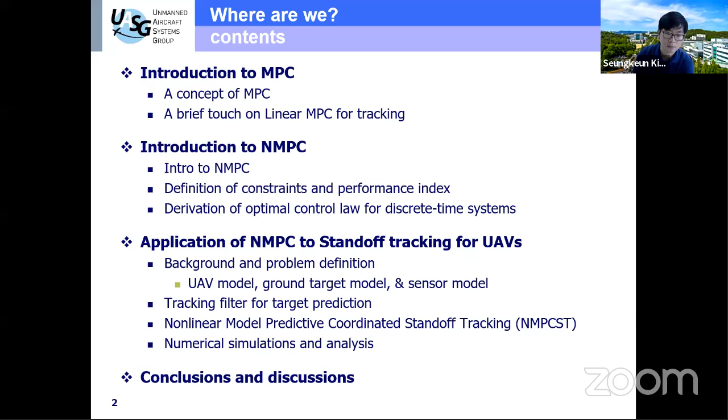Okay, briefly, MPC repeats: plan for the future and do now, repeatedly, plan for the future and do now. As shown, can you see the laser point?

Yes, so we're doing the planning and do-now, act and plan, and do-now at every sampling time. Actually, this is open loop optimization because in the future time, there are no sensor signals. So at each sampling time, MPC solves an open loop optimization problem. For this, we need the model for prediction.

For a linear system, a state space system, we can easily predict the motion of the state variable by using the Euler integration formula. In case of a nonlinear system, in a similar way, we can predict the future state using the nonlinear equation: x dot equals an arbitrary function of the nonlinear system, a function of state and control input. So we can call it nonlinear MPC.

Today I will talk mainly about nonlinear MPC. For this, the important thing is the length of predictions. Actually, however, it is difficult to do for an infinite horizon.

So we will set up the prediction horizon. Actually, if we set the prediction horizon longer and longer, it causes computation burden, and then we cannot control the far-away performance index. So the far-away performance index can be met, but the closest time cannot be guaranteed.

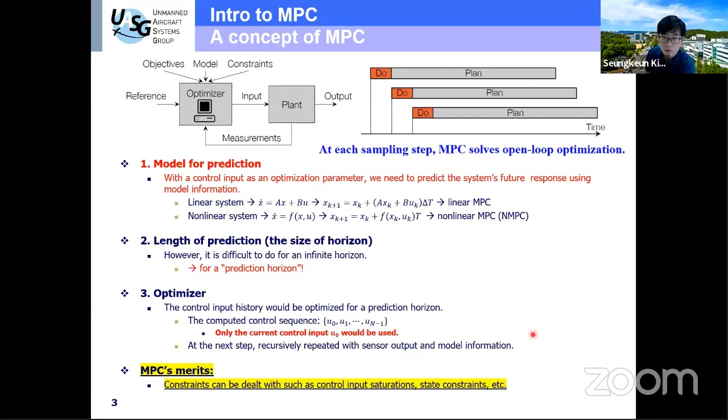Especially the linear MPC is widely used for chemical plant process and process engineering. Normally the cost is set up as the final time command tracking error, and then delta U, the control input increment, and then the other time steps' command tracking error. So Y equals CX. If we have the desired Y, we can set a Y tilde, and then inequality constraints can be considered.

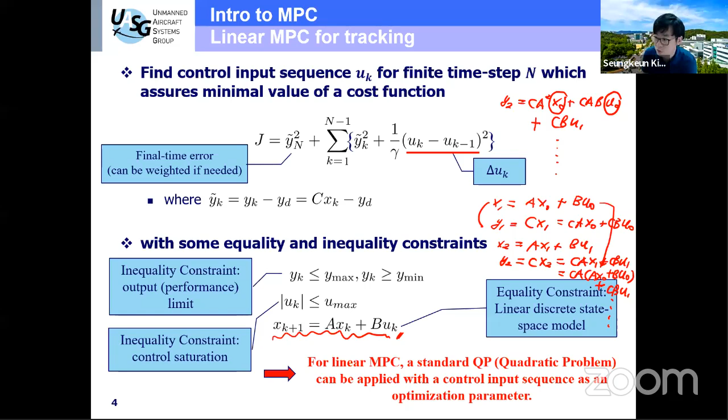In this way, we can use this for collision avoidance of autonomous cars and drones, etc. I have experience with that, but today I will focus on nonlinear MPC, the nonlinear model predictive control. So I will just briefly touch on this linear MPC.

Now let's move on to the introduction to nonlinear model predictive control. This figure shows the overall block diagram of the nonlinear model predictive control. So there is a plant here, generally represented as this nonlinear equation in a discrete time domain, and this is the initial condition. Then the output is fed to the state estimator, and we can get x hat here.

So this NMPC controller requires, firstly, the cost and constraints, and secondly, the predictive model. This is very important - we have to use this equation, and it has to be accurate. Normally I'm using just the mass point model. This is kinematics, not dynamics, and kinematics is very accurate. We can use it for path planning or the guidance level. So the optimizer can use these two elements to generate the control signal U here.

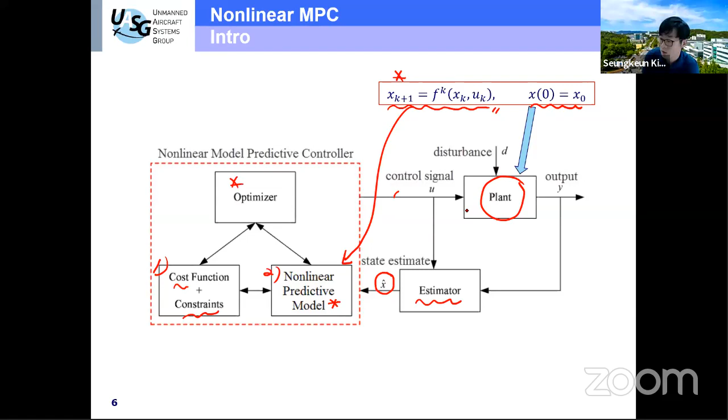So the constraint is the nonlinear discrete time dynamic system. I will call this equation 1: Xk plus 1 is an arbitrary function f of the time k, state, and control, with this initial condition. Another one is the performance index, the cost, what we want for guidance or path planning. I will talk later about standoff tracking, and how I set this performance index for standoff tracking.

Normally it has two components. The first one is the final time cost - what we want and have to minimize at the final time, this is phi, and then this is L. Then there's the other time steps' cost, from the initial time step to N minus 1. Actually, at the last time step, large N, we cannot decide the control input at that time. So normally we separate the final time cost from the in-between time cost.

So our optimal control problem is to find control UK star on the interval from the initial step to the final step that can drive system 1 along the trajectory xk such that the value of the cost, or performance index number 2, is minimized or optimized.

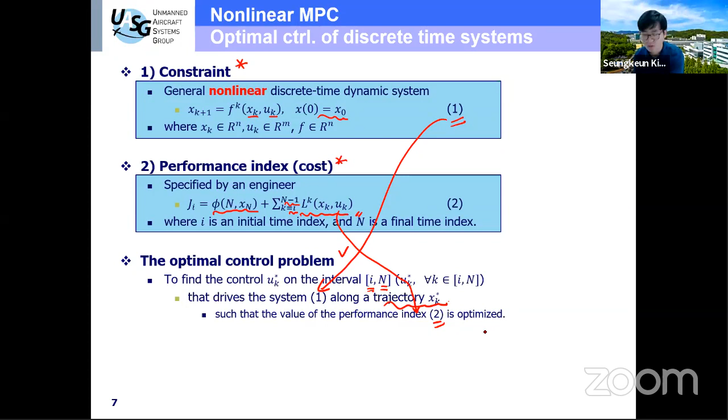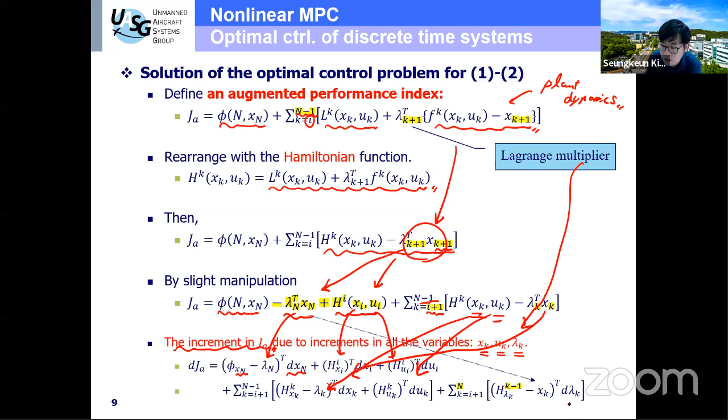And then lastly, the function of lambda here and here, so you can get these two terms.

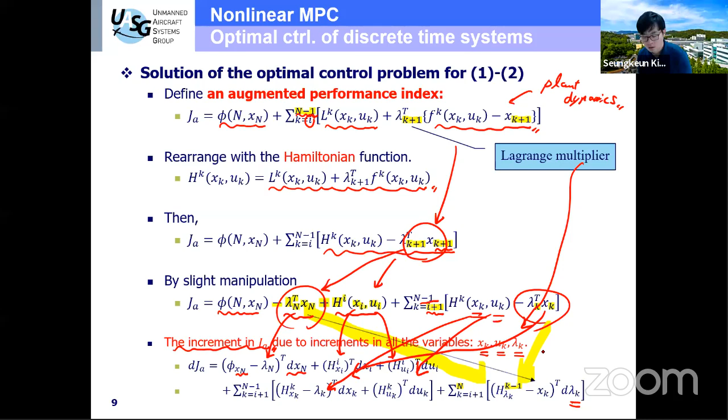It is a complicated set of lines here, sorry about that. So finally, we are getting this final differential form of the cost.

For this cost to be optimum, it has a minimum point, so the differential should equal zero. So here, here, and here must be zero, and we can get these three equations.

This equation is actually the dynamic constraint, the dynamic equation for the plant from equation 1. This equation is the co-state equation about the Lagrange multiplier. And this equation is the optimality condition with respect to u.

And then here, there is a boundary condition for the final time and initial time. So for the final time, this term should be zero to be minimum.

However, normally our final state is free for optimization in our application, so dxn is not zero. So this term must be zero, and we can get one boundary condition here.

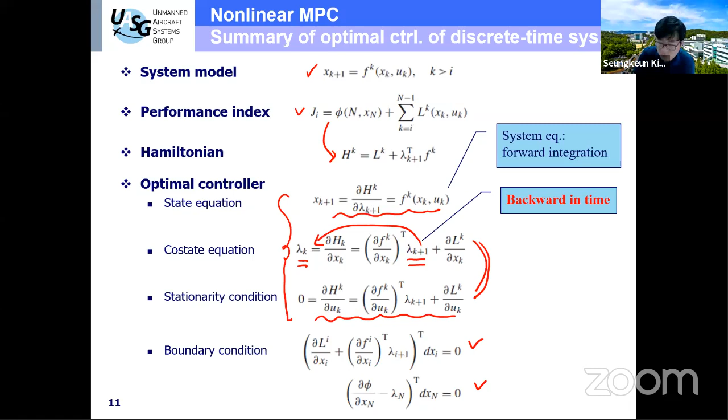Before going to the standoff tracking application, I will introduce this book and this website. Actually, this is not my book, but it is very good for a first-time user of nonlinear model predictive control.

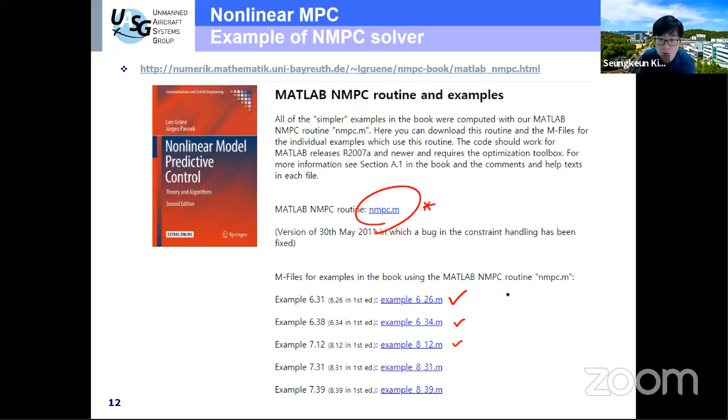If you go to this website, you can get the nonlinear model predictive control routine, the function, and there are examples here. That is very good. And if you see the nmpc.m file, if you download it, you can see that fmincon is used.

fmincon is a function for minimization with constraints. This is a MATLAB function built inside MATLAB. So you can easily set up the cost and constraints. This one is very useful for a first-time developer of nonlinear model predictive control.

So I'm just introducing this website. Actually, I didn't use this function for my application, but a first-time user can use this kind of toolbox.

Now let's move on to the application of standoff tracking for UAVs. First, I will talk about the background and problem definition.

I assume the 2 UAVs can track this ground vehicle, a car. There are 2 things we want. First, standoff distance keeping - I want to keep the distance from the target to the UAV, RD. In my simulation that is 500 meters. The other is antipodal tracking.

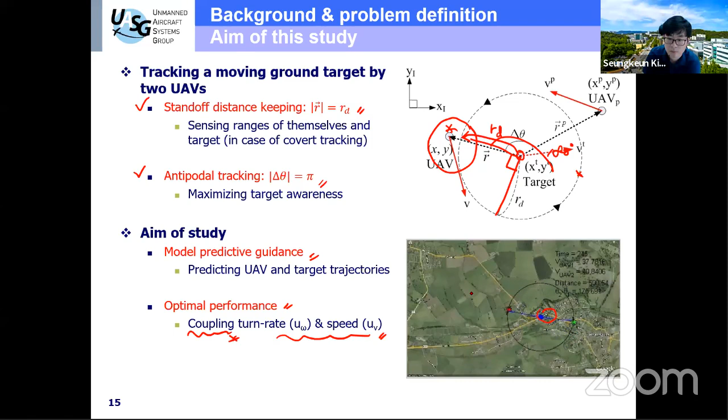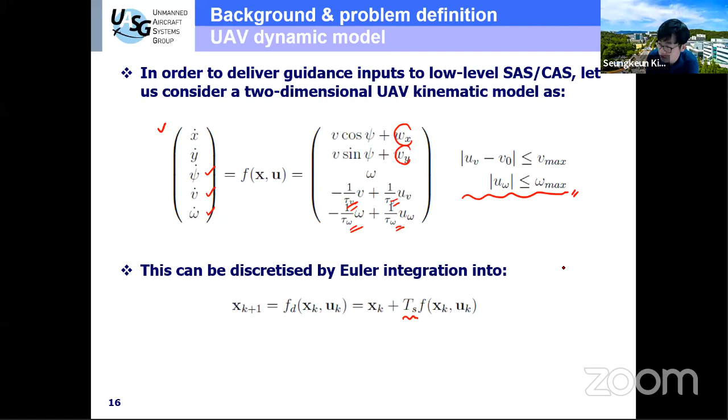The UAV dynamic model is simply a point mass model: x dot equals v cosine psi, with disturbance, where psi is the heading angle, and velocity and rate of change of heading. There is some delay in the control loop, so I assume a small delay inside it. This equation can be described by Euler integration using sampling time, and there is a control input saturation setup here as an inequality constraint.

For a realistic situation, I designed the tracking filter using a Kalman filter. Although ground vehicles generally move at lower speed than aerial targets, they irregularly stop and go with small radii. I'm using a traffic simulation program.

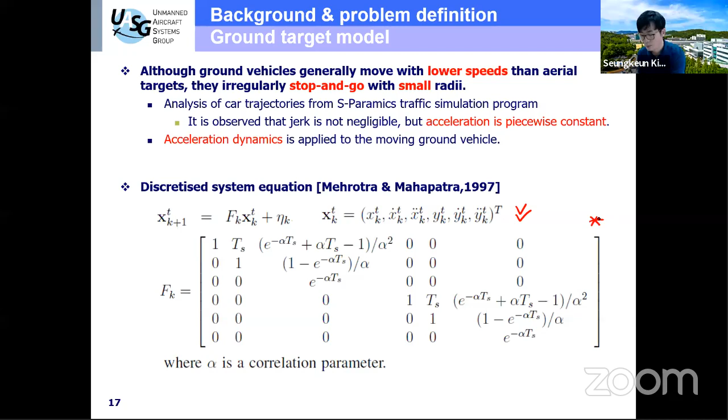It is observed that jerk, the differentiation of acceleration, is not negligible, but acceleration is piecewise constant, so acceleration dynamics can be applied to the moving ground vehicle. This is the acceleration dynamics model proposed by these authors in 1997, which I'm using as the target tracking model.

The process noise of the target acceleration characteristics can be set up as shown here. You can see their paper about the tracking filter, the linear model, so I'm skipping the detailed explanation.

Let's move on to the sensor model. I assume the UAV is carrying a moving target indicator radar to localize the position of the target, but it is not sensing the position directly.

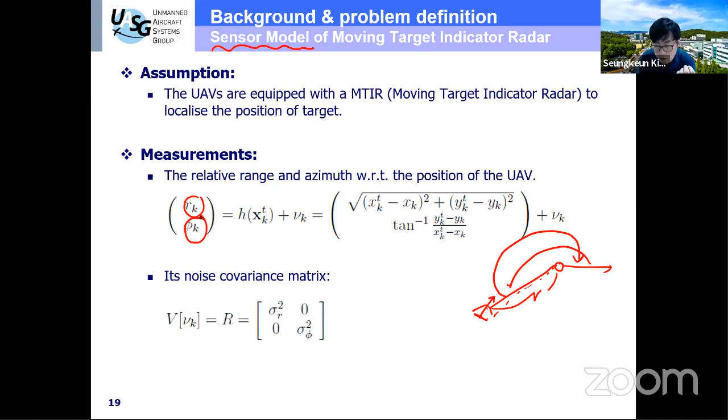Here is the UAV and the target here - they are sensing the heading angle, azimuth, and distance r. So our measurement is the relative distance and relative heading to the target from the UAV. This is nonlinear, so we have to apply the extended Kalman filter here, and we can set up the noise covariance matrix this way.

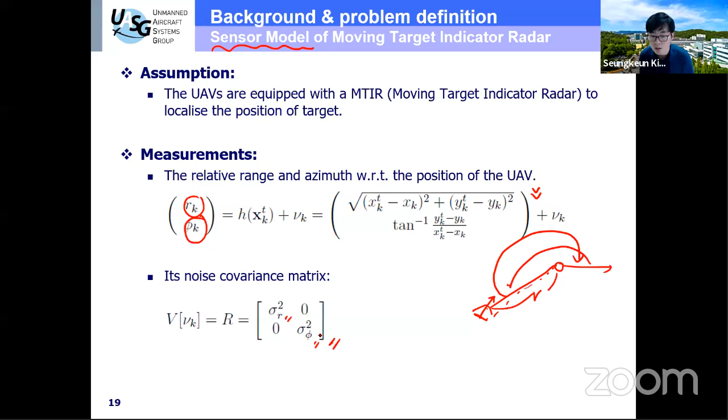Are you with me? Okay. Yes, yes, yes. Now let's move on to the tracking filter.

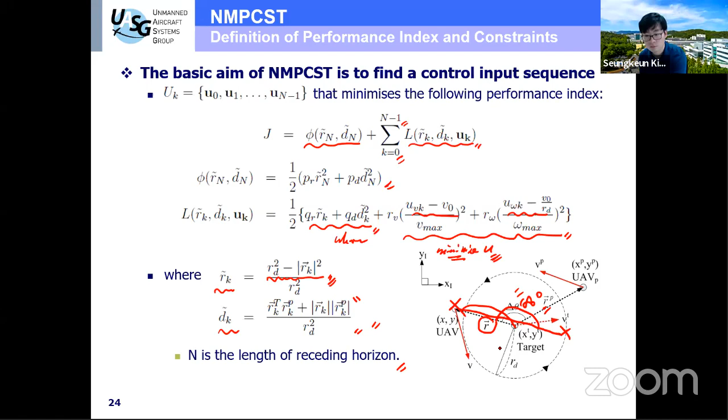This is why I'm using this kind of cost for antipodal tracking here. D tilde is derived from the inner product of RK and RK pair. So it's target and UAV1 here, and UAV2 is here. This is RK, and this one is RKP.

So if you want 180 degrees between these two vectors, this angle becomes pi—very simple. Pi means this is -1. So if you move this term to the left-hand side, you get this equation. If you minimize this left-hand side squared, you get antipodal tracking. This is very efficient compared to using the angle difference directly.

Then there is a normalization problem, because standoff distance keeping is in distance units, and antipodal tracking is in degrees or radians—so there's a gap in physical dimension. So I'm using this kind of technique.

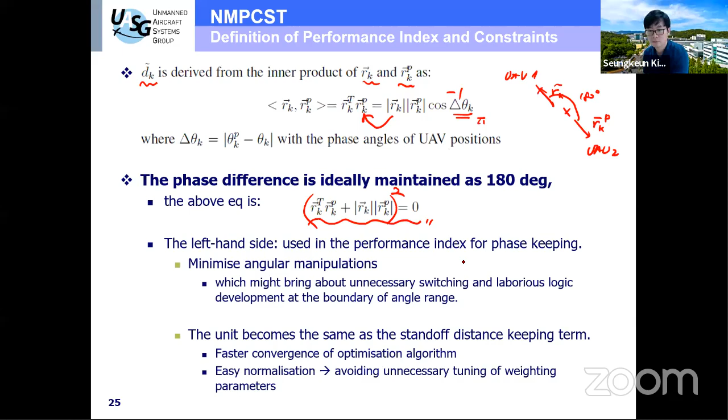So let us set up the augmented performance index defined by incorporating equality and inequality constraints. Here, this is the system equation. And then this one is the cost: standoff distance and antipodal tracking. And then this one is control input saturation, and this is collision avoidance, inequality constraints.

I'm using l here and there, in this way. This makes the inequality constraints applied only when they are violated.

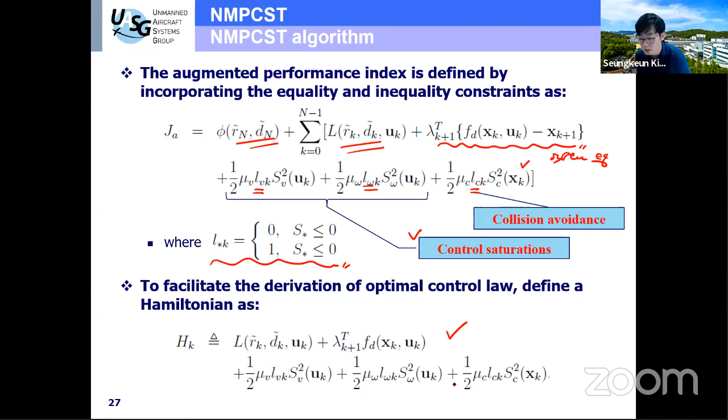To facilitate the derivation of the optimal control law, let us define a Hamiltonian in a similar way, like this. And then, in a very similar way, you can get the variation, like this, as I explained before for the general case.

And then you can get these two conditions. This is actually slide number 10. This is the final time boundary condition.

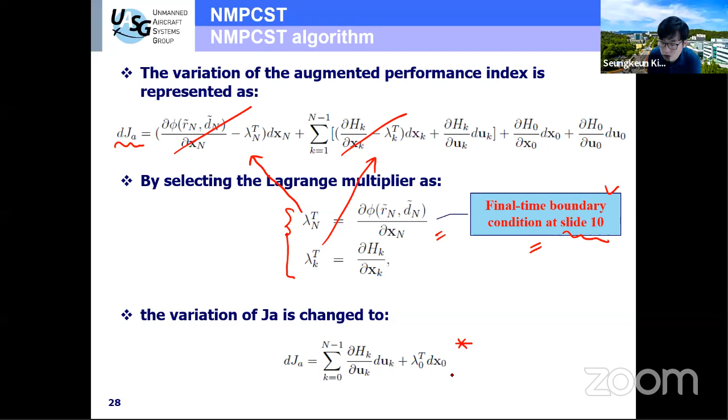So you can get this equation and then variation of JA. If you use this and that, you can get zero for these two terms. So we can get this final variation of cost.

And then here, we need some kind of partial differential equation for partial phi, partial xN, and partial hk and partial xk. So I derived this partial differentiation. That is very easy. It looks complicated, but if you do it, you can get the derivation in the same way.

And then finally, we can select duk like this way. And then if you substitute into the dJA from the previous slide, you can get this type of equation. So this always decreases this sign. So if you apply this kind of duk, the cost can always be decreasing.

So the control input can be updated in this way because duk is here. So next time, uk is decided by using this kind of relation. So if you want to do this, you have to derive some kind of partial differentiation about uk and about system dynamics. So this is straightforward.

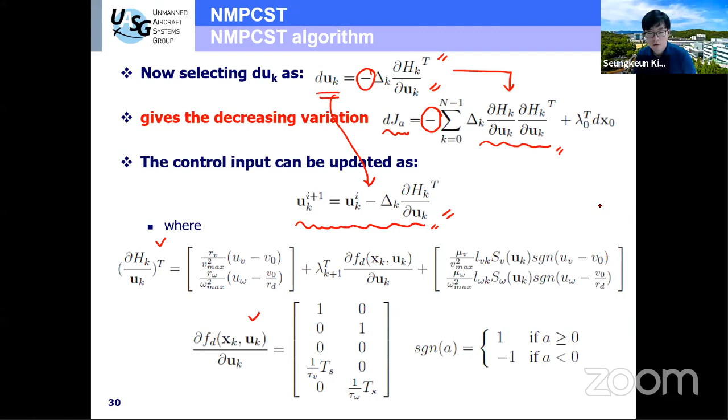Okay, sorry about all the formulations here. So this is my algorithm summary.

So here, this is UAV 1 and UAV 2. By using communications, they are doing separate measurement acquisition from MTIR, and then target localization and sensor fusion, and then communications, and then target state propagation and pair UAV state propagation.

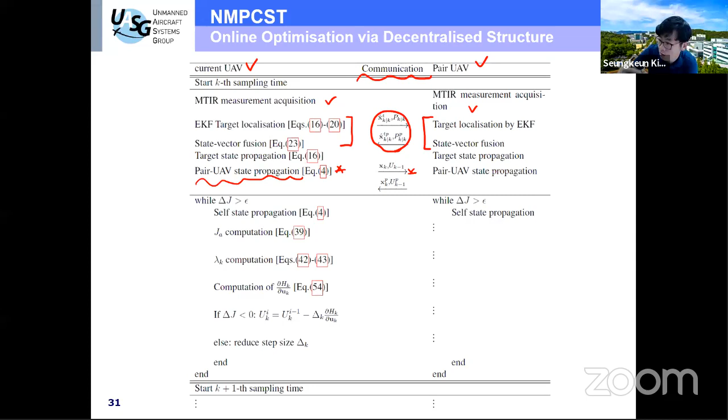We need other UAV's future position and target car's future position. We need that. And then optimization, what I showed up to the previous slide, can be applied in this way.

Lambda and augmented cost and self-state propagation. Self-state propagation means its own propagation using the dynamic model. So in this way, the decentralized structure of online optimization can be applied between the two UAVs.

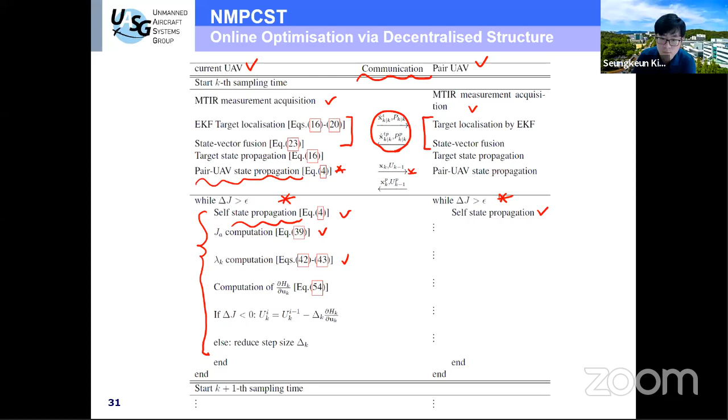Finally, now I'm moving on to the numerical simulation and analysis.

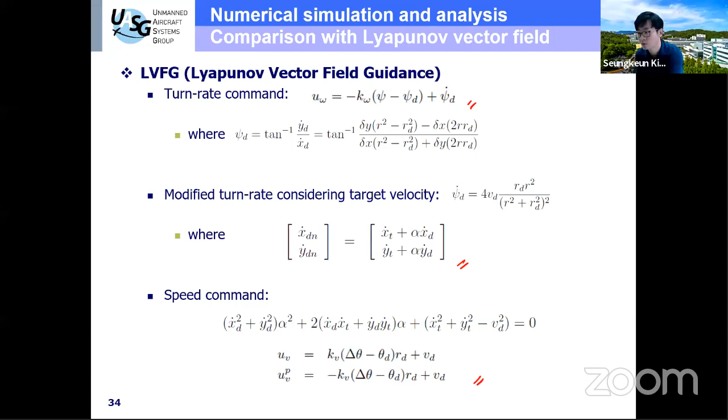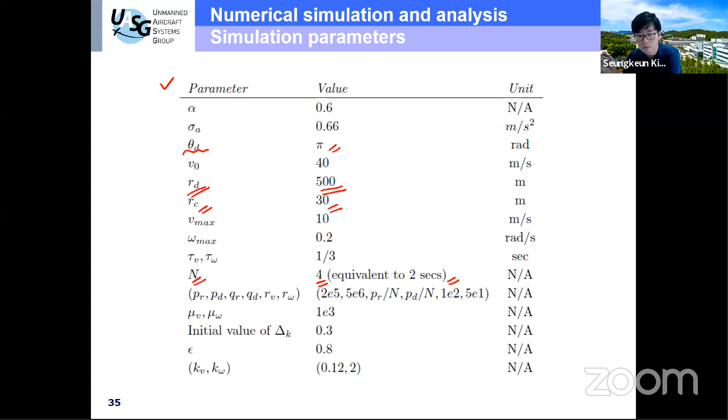Do you agree? It looks very similar, but let us see some graphs.

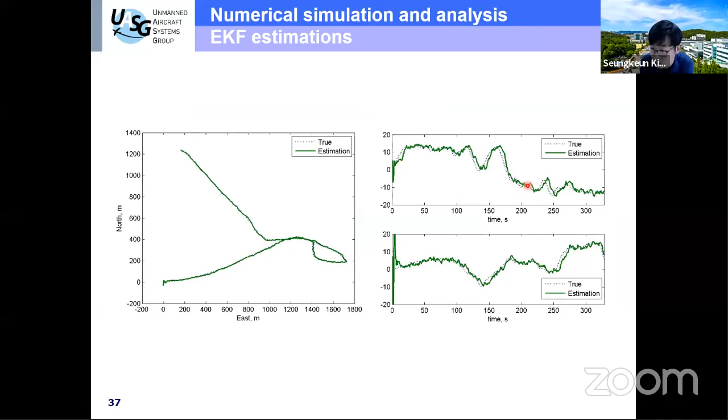Now this is the Kalman filter estimation. So this jittered signal is the sensor signal combined with sensor noise, and then the dotted line is true, and the green line is the estimation by extended Kalman filter after sensor fusion, after communications.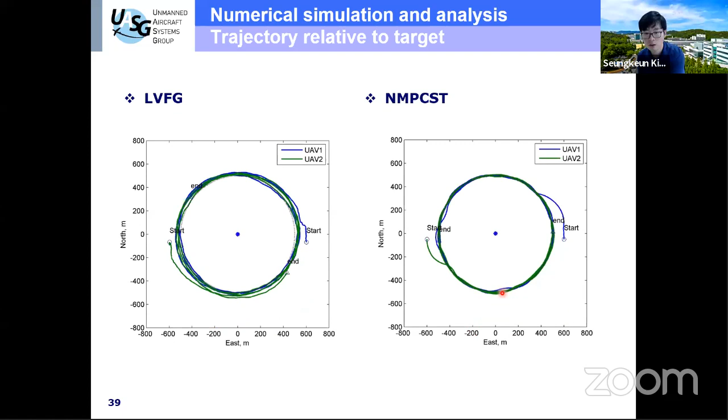This is the relative movement of the 2 UAVs. Can you see the difference? So the standoff distance is not well maintained here, and here. The deviation is much bigger than with the optimization scheme.

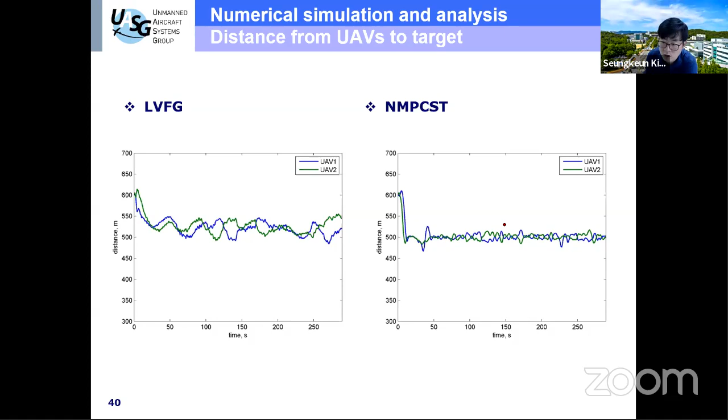If you apply this kind of predictive control, the deviation to the standoff distance keeping is very low. This is the relative distance to target for UAV 1 and 2, and this deviation is smaller than the previous case.

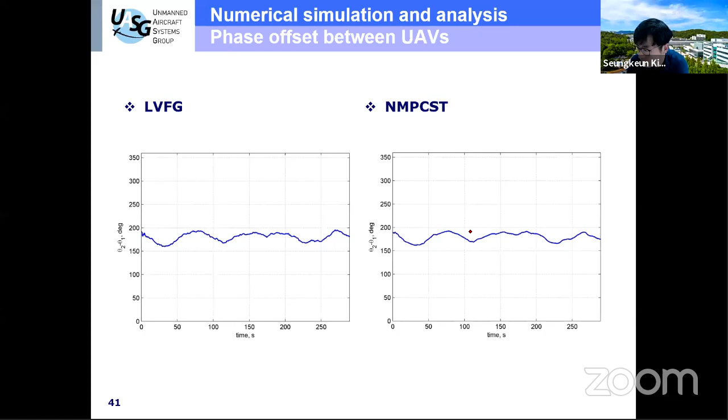And control consumption is at a similar level. So that means the model predictive guidance is using the same level of control, but you can get some optimized performance in the standoff distance keeping.

That was 6 years ago, so nowadays computers are much better. I think it takes shorter than then, and an embedded system could do it now, I think.

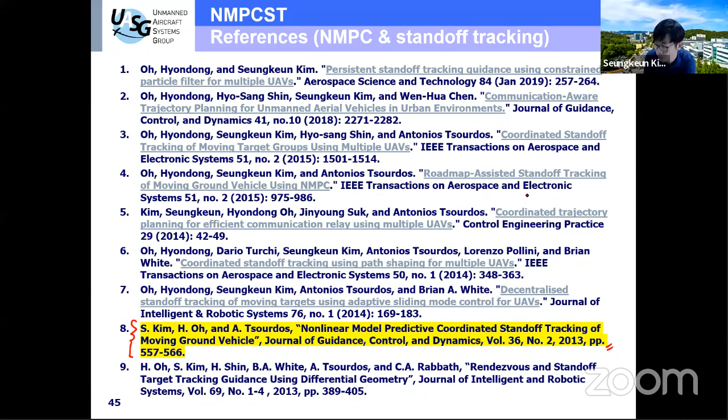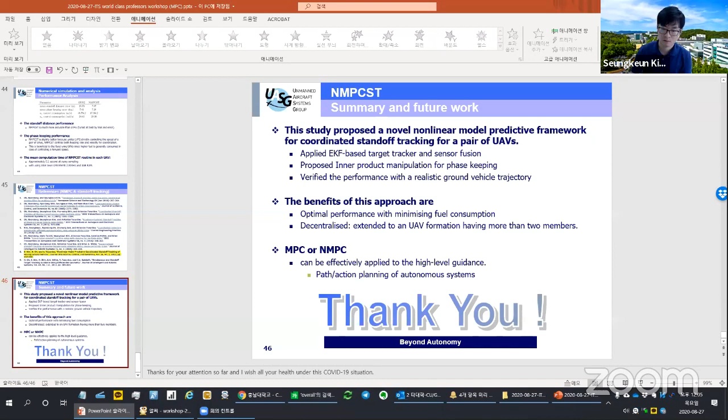Hello, Prof. Kim. Maybe Prof. Kim got disconnected. Just wait for a while. Hello? Hello, Prof. Hello, hello. I think there was some connection problem. So I was kicked out from the Zoom. I'm sorry, was it our network fault? Yes, it looks like it was from the Korean side, I think. Okay, I'm so sorry about the problem.

Anyway, my conclusion is that model predictive control can be applied to UAV guidance with more than 2 members, not for inner loop control or attitude control, but at the level of guidance, position keeping, or commanding to the next waypoint, etc. That can be easily applied to high level guidance, and to path and action planning of autonomous systems.

So only if you can set up the proper cost for what you want, you can easily apply it to MPC. Nowadays MPC is widely used, especially linear MPC in industry. Industrial people think MPC is the most useful control technique for their future, but in autonomous systems and aerospace domains, up to now it is still difficult to apply this MPC scheme to the inner loop controller.

I think so because there are much uncertainties in the dynamics, and aerospace systems are always flying, so if it is falling off, it can be a big problem.

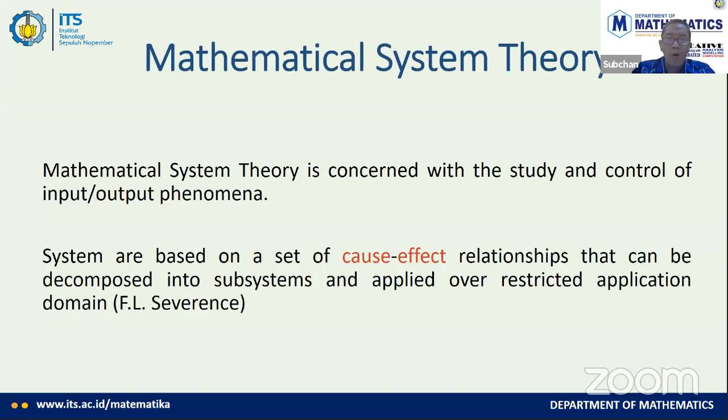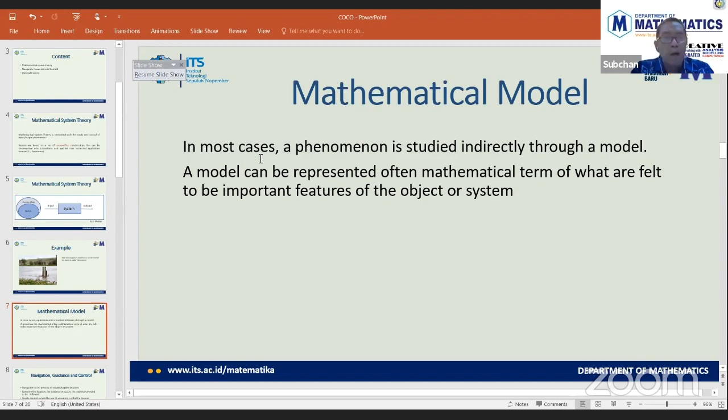Now we are coming to navigation, guidance, and control, which is part of mathematical system theory, as Prof. Kim explained a lot already. What is navigation, guidance, and control? Usually these three words get mixed up together.

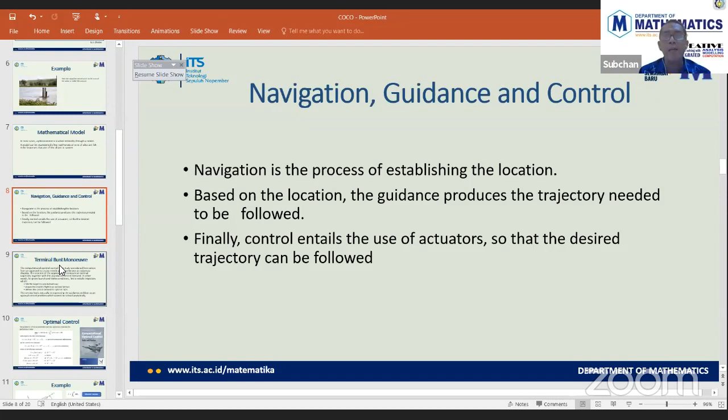It is simpler than Prof. Kim's because this one is open loop, as I use in my book. So we have terminal bunt maneuver. What is terminal bunt maneuver actually?

When we want to hit a target by cruise missile, what we want to do actually is destroy it from above. The missile should find the target from above. Strike is destroying, coming from above the target, or 90 degrees from the target. That's why we call it terminal bunt maneuver.

So in this case, let's say I want to hit the bunker, where the bunker itself is usually not clear, is under the surface of the earth, hidden on the ground actually. That's why we have to hit the target from above.

So in this case, the action of the approach is to compute an optimal trajectory together with the associated control. In other words, for a given launch and strike condition, find a missile trajectory which hits the target in the predefined way, shapes the missile flight in the optimal fashion, and defines the control demand for the optimal path.

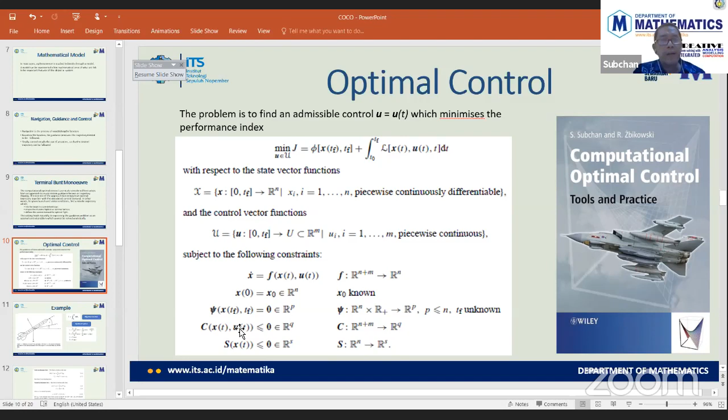Okay, this one is a little bit of theory, and this one is the problem. And this is not a simple problem because the component inside the dynamic here has very complicated terms.

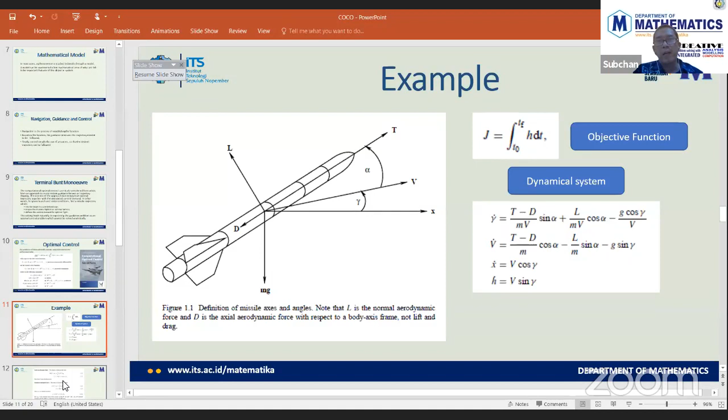Let's say the drag here, D is the drag, and drag force as well we have, and also normal aerodynamic force L here as well. It depends on the coefficient of lift and the wingspan or S reference as well, and here the air density of the area. And we define as well the initial condition and final condition.

And how to solve this problem? Sorry, before that, let me explain a little bit about the constraint as well. As I mentioned before, we have a state path constraint, which is the speed of the missile. It is not as easy as we think - they have minimum speed or maximum speed.

What does it mean actually if we have a missile? Let's have a look. Let's say when we drive a motorbike, when our speed is, let's say, 200 kilometers - not like the MotoGP, yeah. Let's say when we live in Seoul, or Chungnam, or let's say in Surabaya, we cannot drive 200 kilometers per hour. Otherwise our motorbike will break.

And we drive very slow, let's say less than 10 kilometers per hour, then we will have a problem - we will fall down actually because it's too slow, unless you walk with your motorbike. That's less than 10 kilometers per hour. That's why this one is realistic.

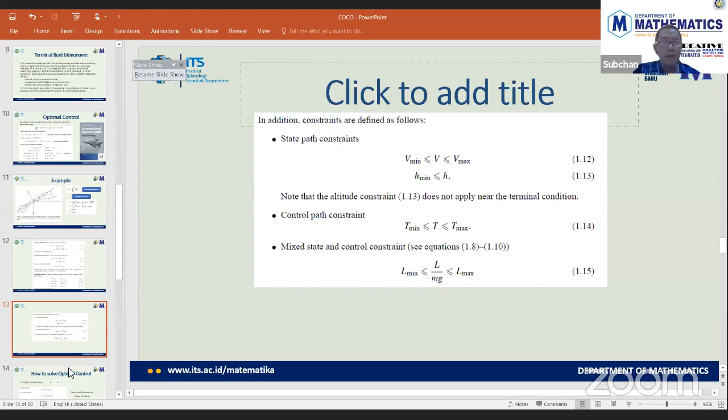Actually, we have to define the Hamiltonian, as Prof. Kim mentioned before. We have H here - I'll make it simpler. We have the Hamiltonian, we have the Lagrangian part of the objective joined with our dynamic system. Then, of course, we have some two-point boundary value problem.

Here is the stationary condition. We have to take a first derivative of the Hamiltonian with respect to all the controllers and set it equal to zero. Then we substitute U itself into the Hamiltonian, and we have to take x dot and lambda dot as the state and co-state equations. As Prof. Kim mentioned, here is the boundary condition. It's simpler than Prof. Kim's actually, because he translated it to the discrete one.

So you know the problem. We want to minimize the altitude of the missile while we want to hit the target from above. So I will give you some results now.

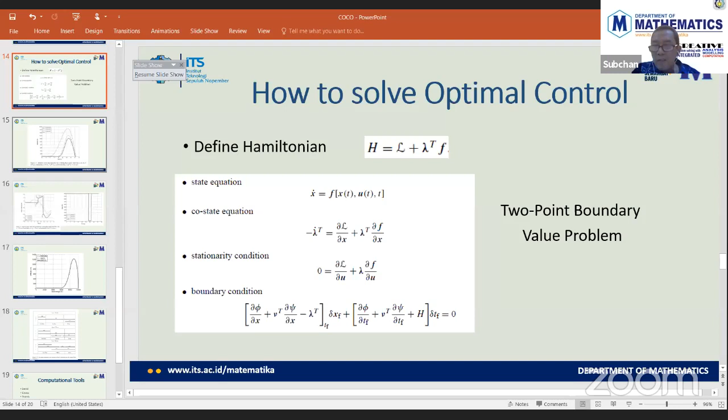Here is the result. I'm sorry, I put the time below actually. So the missile, when we launch at 30 meters altitude, the missile will fly as low as possible.

See the final speed. When we hit the target with higher speed, we have to maneuver a bit earlier, flying above and down a bit faster. If I want to hit the target, VTF here - sorry if that's not clear - VTF is the speed at the final point. The missile has to hit the target at this different speed.

For speed 310 meters per second, the missile should take a position a bit earlier, flying up and down a bit higher, because we have to take position - in Indonesian we call it ancang-ancang - because we have to hit a target a bit faster.

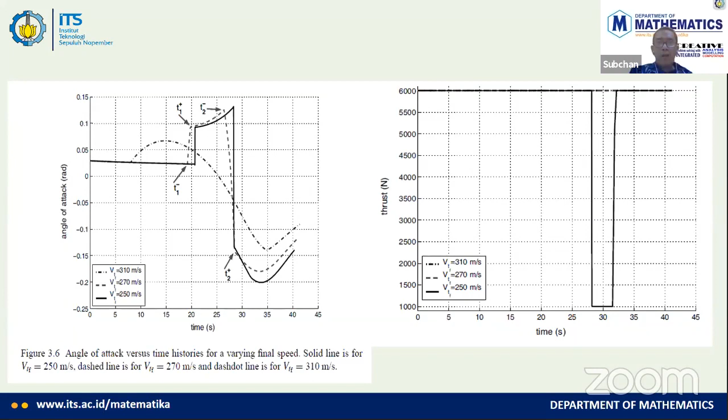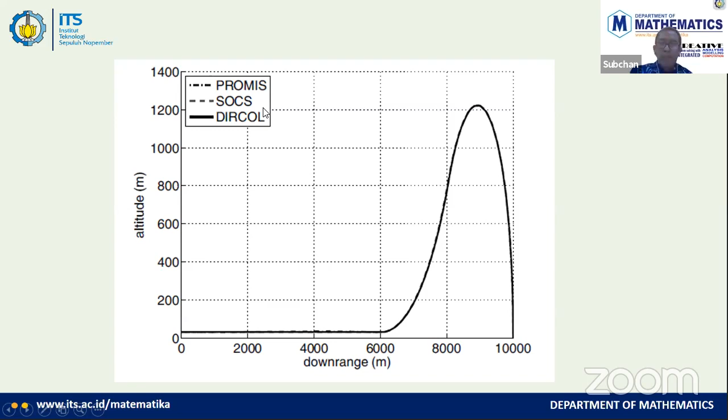So here is the performance of the flying between 310, 270, and 250. See the difference - we have level flight, level climbing. In this case it's flying up or climbing, memanjat in Indonesian. And finally we have diving. H here is the altitude, thrust, and L is the normal aerodynamic force.

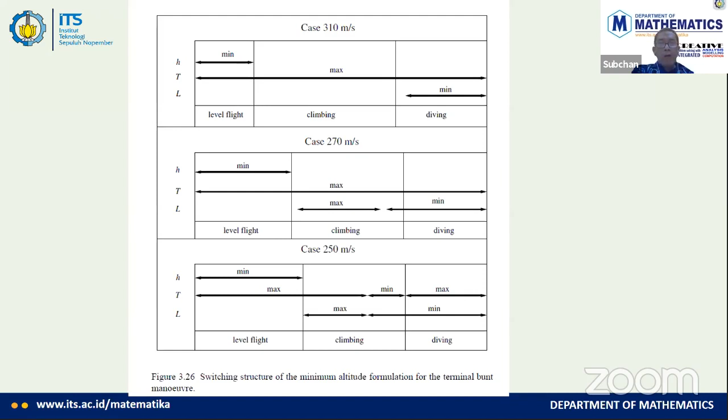Because my title is about computational tools for computational optimal control, I would like to mention that there are so many computational tools, especially in the open loop case, like what I did, different from what Professor Kim did. My research at this presentation is using open loop.

We have a tool called GPOPS. The simplest one actually is BVP4C, which is available on MATLAB, like FMINCON as Professor Kim mentioned. BVP, boundary value problem 4C, was developed by Prof. Lenhart from Tennessee University, US, if I'm not wrong.

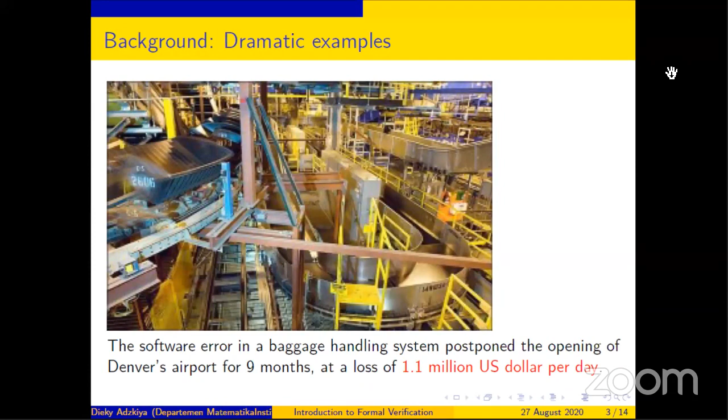The next example is about the online system for booking air flights, as we usually use when we book flights. When there is an error or a problem in the online ticket reservation system, the company may go bankrupt because of this, since they have to give compensation to their customers, which takes a huge loss for them.

The next example is from the launch of the Ariane 5 rocket, which was launched in June 1996. It crashed 36 seconds after launch, and after investigation, the reason was found to be the conversion from a 64-bit floating point value to a 16-bit integer value.

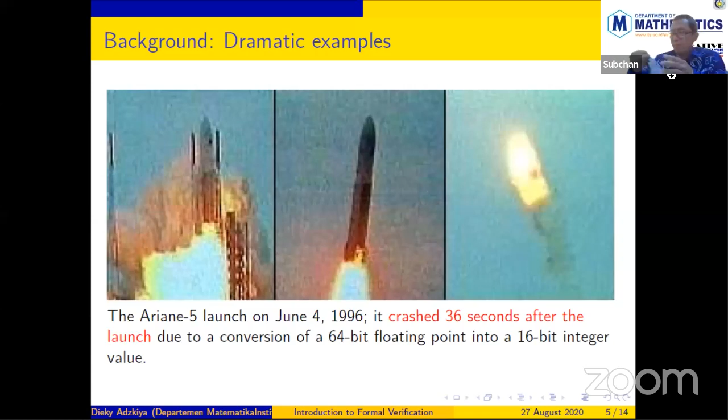And this is also another example. So this is a medical equipment to give radiation therapy to patients that have cancer problems. The name of the machine is Therac 25, and between 1985 and 1987 there were some patients that died because of overdose of radiation. The amount of radiation was too much, so they were killed because of that.

So from the examples that we just discussed, we know that there is a problem in the stage when we want to decide whether a prototype or a model is good or not, whether it satisfies our requirement or not.

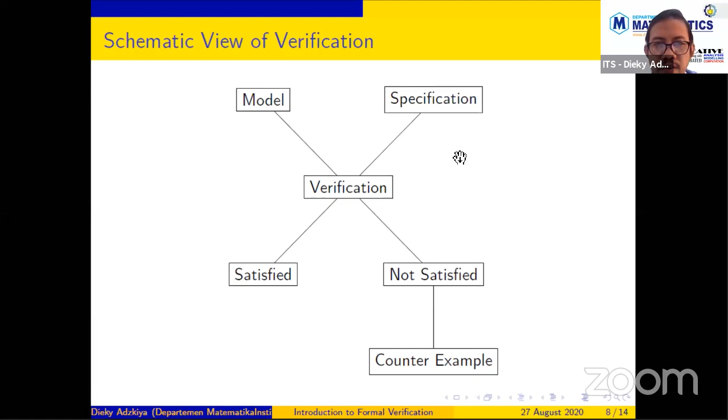For mathematical models, I think we already know about it because we are familiar with it, like linear systems or nonlinear systems. But in the literature, there are also methods for verification that have been applied to many models, such as transition systems. Transition systems is a simple model, and this is the first model where we can use formal verification because it is simple. The number of states is finite. Some people also call it automata.

After that, some people also apply formal verification to other models such as timed automata, differential equations. This is the model we have seen in the previous two presentations—it can be linear systems or nonlinear systems. This technique has also been used for stochastic systems such as Markov chains, Markov decision processes, or Markov jumps, and some other things, as well as stochastic differential equations.

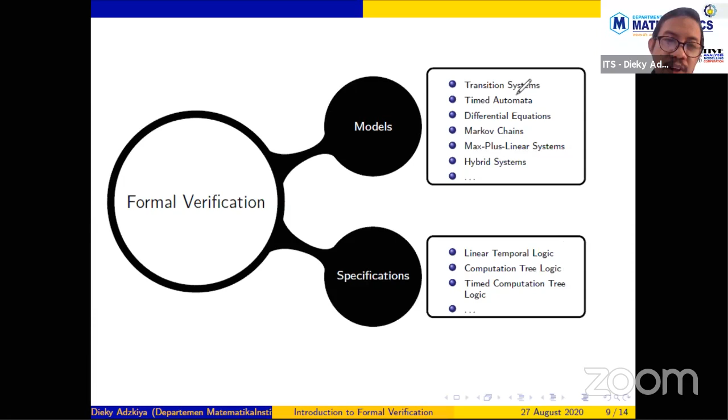But of course, in formal verification, the type of specification is a little bit different, though the idea is the same. We want to verify whether the behavior of the system satisfies the specification or not.

So what is the specification in this case? The specification we may want to verify is whether the lights in both lanes are never both green simultaneously. Why do we need to verify this? Because if the lights are both green at a certain period, then cars may crash from both lanes. So this is one example of the specification that is of interest to us.

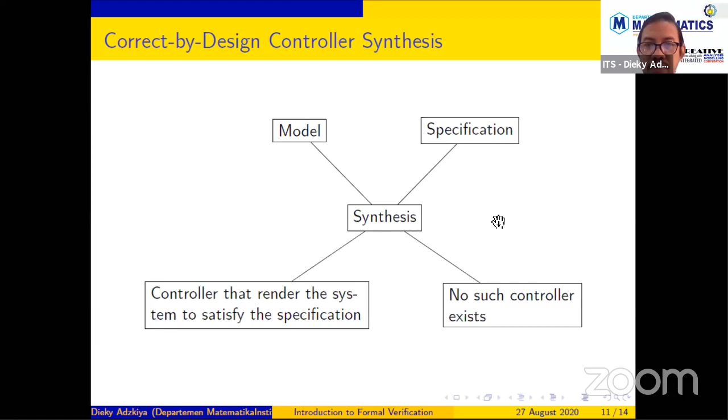So this is an example of a tool or a method for controller synthesis for nonlinear systems. The name of the tool is SCOTS. This is a tool for the synthesis of symbolic controllers. It uses the name symbolic controller to differentiate it from the traditional controller. Symbolic controller usually means the controller that is synthesized by using formal verification. Sometimes many authors use the name symbolic controller.

So here we have a kinematic model, as you already know. The kinematic model is a nonlinear ordinary differential equation because it has sines and cosines in the right-hand sides. So this is an example of the results.

As you can see here, we have a particle, and then the initial position is here. This is the initial position, the green area, and then the red area is the destination. We want to reach that, but in this area there are also some obstacles. The obstacles are the blue area.

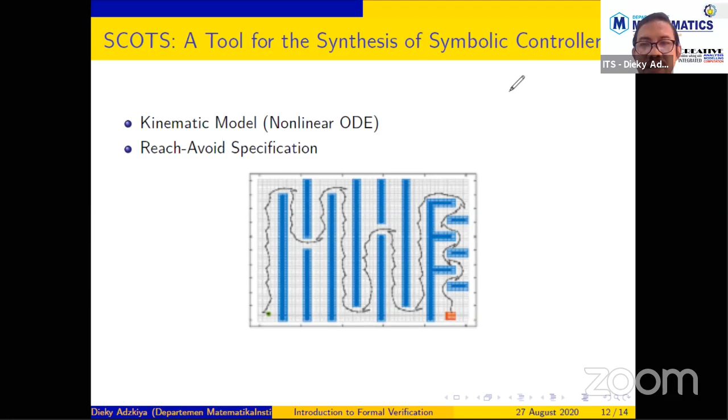If you are working in artificial intelligence or deep learning or big data, I think it is not new to you. Deep neural networks have achieved impressive experimental results for image classification and other fields. However, if there is a perturbation or changes in the image, the results of the classification may change. For example, lighting conditions - at night and also at noon, the same objects may be classified differently - or changes in the camera angle may also change the classification results from deep neural networks.

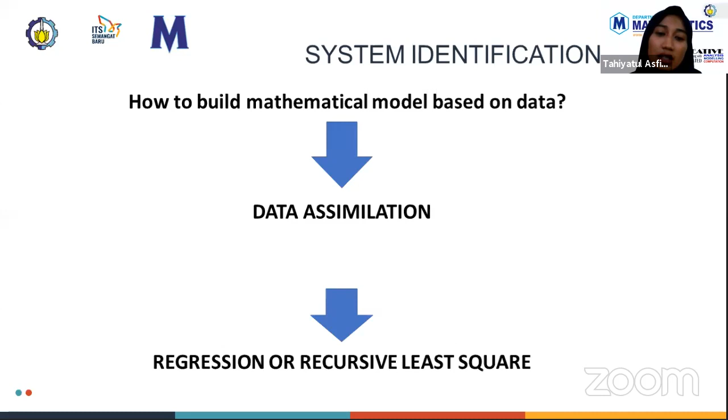Nah, setelah semua data itu lengkap, kita bisa mengetahui beberapa data yang kita perlukan supaya bisa mengetahui parameter sehingga bisa melengkapi model matematika tersebut. Setelah mendapatkan itu, kita bisa mendefinisikan parameter berdasarkan pada regresi atau dengan menggunakan recursive least square.

Nah, ini nantinya kita akan aplikasikan atau cara mendapatkan sistem identifikasi pada kapal tanpa awak atau unmanned surface vehicle. Ini adalah kapal tanpa awak kami dengan dimensi kapalnya sebagai berikut. Dengan data atau sensor yang kami peroleh adalah posisi, kemudian ada sudut yaw dan sudut roll.

Nah, sistem identifikasi pada kapal tanpa awak, kita harus mengenal terlebih dahulu apa saja variabel-variabel yang harus ada atau bagaimana sistem ini harus terbentuk. Pada data yang tersedia, tadi sudah disebutkan adalah mengenai posisi, roll, dan yaw. Padahal gerak kapal itu sendiri terdiri atas gerak translasi ada 3, gerak rotasi ada 3.

Di sini ada gerak translasi yaitu surge, sway, dan heave. Kemudian untuk gerak rotasi itu sendiri ada roll, yaw, dan pitch. Nah, pada penelitian ini yang kami amati adalah mengenai gerak kapal tanpa awak, mengenai gerak manuver. Sehingga yang kami amati maksimal di sini adalah 4 derajat kebebasan, yaitu surge, sway, yaw, dan roll. Untuk variabel-variabel yang lain kita tidak memperhitungkan hal tersebut karena semakin kompleks suatu sistem, kita sesuaikan dengan kebutuhan.

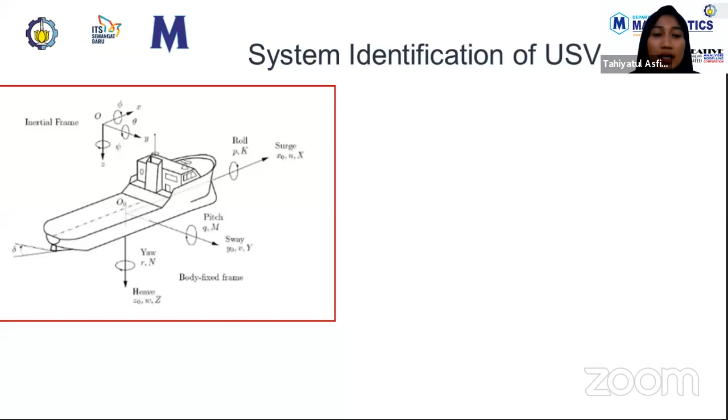Terus kemudian data yang kita punya adalah roll, kemudian yaw, dan tadi adalah posisi. Ini adalah data pengukuran yang ada. Di sini berdasarkan pada sudut yaw dan sudut roll, bisa kita dapatkan kecepatan sudut yaw dan kecepatan sudut roll dengan cara mengolah data yang ada di sudut yaw dan sudut roll.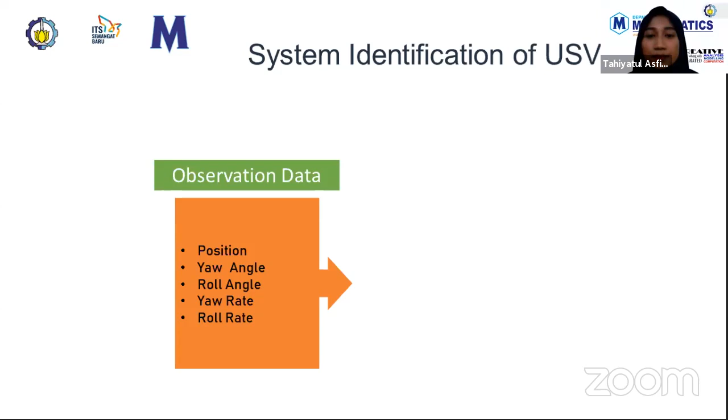Kemudian untuk model matematika, apa saja yang harus kita definisikan di mathematical model yang kita perlukan untuk keperluan kami di gerak manuver kapal tanpa awak, yaitu kecepatan surge, kecepatan sway, kemudian kecepatan sudut yaw, kecepatan sudut roll, posisi sudut yaw, sudut roll. Nah, di sini pada yang terakhir ada dynamics of X, Y, K, N.

Apa sih X, Y, K, N tersebut? Kalau berdasarkan pada model matematika kapal tanpa awak, itu merupakan sebuah fungsi dari variabel yang masih mengandung beberapa variabel. Nantinya nilai X, Y, K, N itu harusnya bisa kita prediksikan supaya kita bisa mengetahui bagaimana hubungan ketika kapal berlayar di laut atau di air akan menimbulkan sebuah koefisien hidrodinamika. XYKN itulah yang merepresentasikan hal tersebut.

Kemudian berdasarkan pada matematika model tersebut, maka dengan observasi data atau data pengukuran kita menggunakan unscented Kalman filter untuk mendapatkan nilai-nilai atau estimasi dari kesemua variabel yang ada di matematika model.

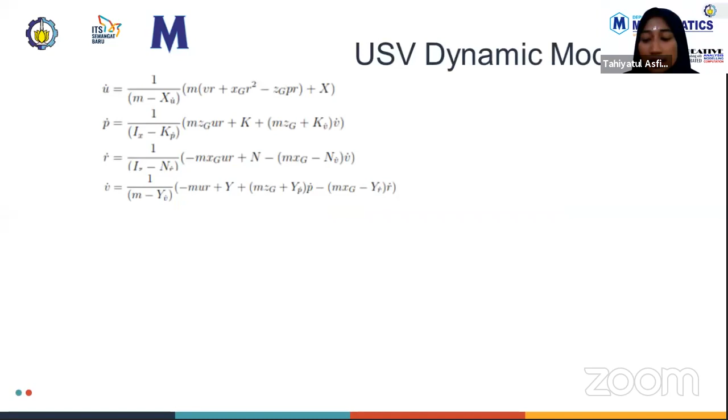Seperti yang saya ceritakan tadi, di sini ada X. X di sini merupakan suatu fungsi dari variabel U, V, R, dan seterusnya. Begitu juga pada X, Y, K, N, dan seterusnya. Nantinya nilai yang ada di sini, X besar, itu harusnya bisa kita definisikan sebagai variabel baru supaya nanti bisa kita dapatkan nilai X besar. Karena nilai X besar itu sendiri tidak diketahui, karena dia bergantung pada V, R, dan seterusnya.

Kenapa tidak diketahui? Karena nilai XUU, XVR, dan X phi phi, XRR, X delta ini tidak kita ketahui. Nah, tujuan dari sistem identifikasi nantinya adalah menentukan XUU, XVR, dan seterusnya. Dan itulah yang disebut dengan koefisien hidrodinamika.

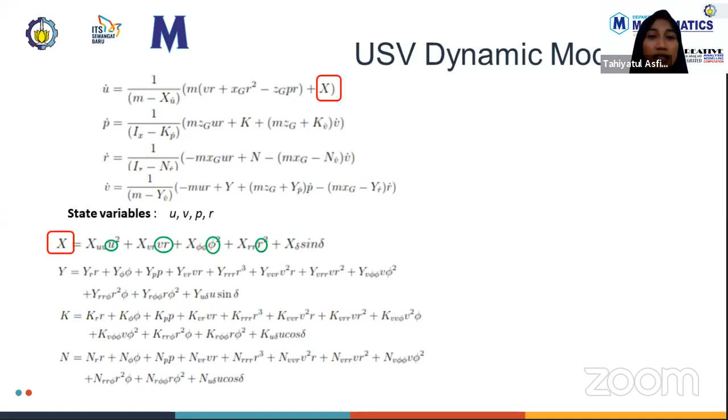Nah, di sini kita definisikan mathematical model of augmented system. Karena tadi yang kita ketahui adalah kinematika model, ada posisi, kemudian sudut roll dan sudut yaw.

Dan ini adalah dinamika model. Nah, untuk X besar, Y, K, N, untuk penelitian ini kita definisikan sebagai second order Gaussian model. Jadi pendekatannya adalah turunan kedua dari X itu adalah berupa Gaussian model, atau di sini disimbolkan X double dot sama dengan white noise. Seperti itu. Nah, berdasarkan pada augmented system ini, nantinya akan kita estimasi dengan menggunakan unscented Kalman filter.

Pada penelitian ini, X, Y, K, N dijadikan sebagai variabel, oleh karena itu maka mathematical model ini merepresentasikan adanya augmented system. Karena sebenarnya X besar itu sendiri adalah sebuah fungsi antara beberapa variabel dengan parameter yang tidak diketahui sebelumnya. Kenapa parameter atau koefisien hidrodinamika itu tidak diketahui? Karena sebenarnya secara real parameter hidrodinamika bersifat time varying atau bergantung pada waktu. Akan tetapi pada penelitian ini kita tidak meneliti nilai dari koefisien hidrodinamika secara time varying.

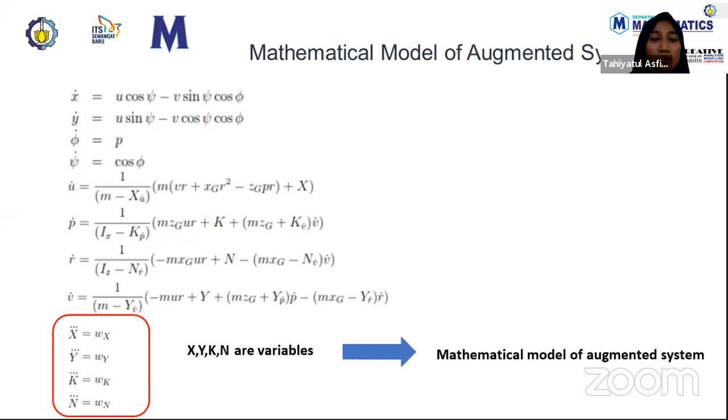Nah, untuk identifikasi koefisien hidrodinamika seperti yang sudah saya ceritakan tadi, bahwa identifikasi koefisien hidrodinamika sebenarnya adalah berhubungan dengan sistem identifikasi. Koefisien hidrodinamika itu sendiri adalah parameter dari sistem, parameter dari model dinamika kapal. Nah, bagaimana kita bisa menentukan koefisien hidrodinamika yang ada?

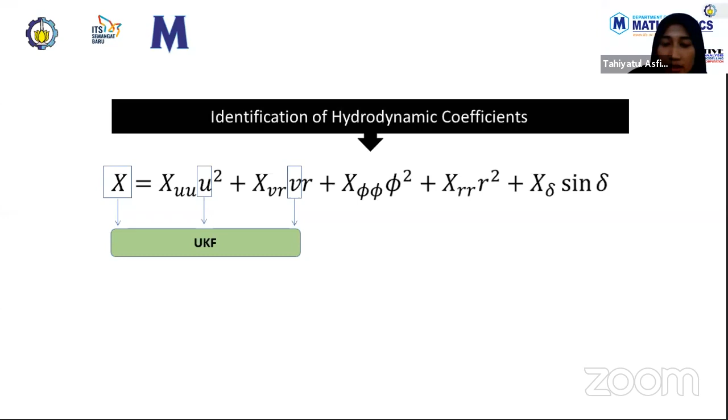Nah, di sini tadi sudah kita melakukan estimasi dengan Kalman filter. Kita sudah dapat data dari Kalman filter yaitu X, U, dan V. Karena data-data tersebut tidak kita miliki, sehingga kita harus mengestimasinya dengan Kalman filter. Jadi tujuan asimilasi data di sana adalah untuk melengkapi persamaan ini, supaya persamaan ini bisa diselesaikan atau kita bisa mendapatkan koefisien hidrodinamika. Oke, terus kemudian di sini R, phi, dan R itu adalah sudut yaw dan sudut roll.

Itu kita peroleh dari data yang kita dapatkan dari sensor. Terus kemudian delta di sini adalah sebagai input. Nah, ini adalah sistem identifikasi dari sistem parameter.

Setelah kita mendapatkan data dari estimasi menggunakan unscented Kalman filter, kemudian ada data dari pengukuran yang sudah kita peroleh dari sensor, kemudian kita mengetahui input yang ada, sehingga kita bisa melihat persamaan ini sebagai persamaan regresi atau istilahnya persamaan linier. Kenapa dikatakan sebagai persamaan linier? Karena nilai U nantinya akan diinputkan sebuah nilai. Nanti ketika persamaan ini dibentuk menjadi persamaan linear akan dicari nilai XUU, XVR, X phi phi, XRR, dan X delta.

Singkatnya atau mudahnya ini bisa kita peroleh dengan menggunakan regresi, dan juga bisa dicari dengan menggunakan recursive least square atau dengan yang lainnya. Nah, itulah yang bisa kita dapatkan, setelah dapat koefisien hidrodinamika, maka kita pasti akan mengetahui karakteristik dari kapal tersebut.

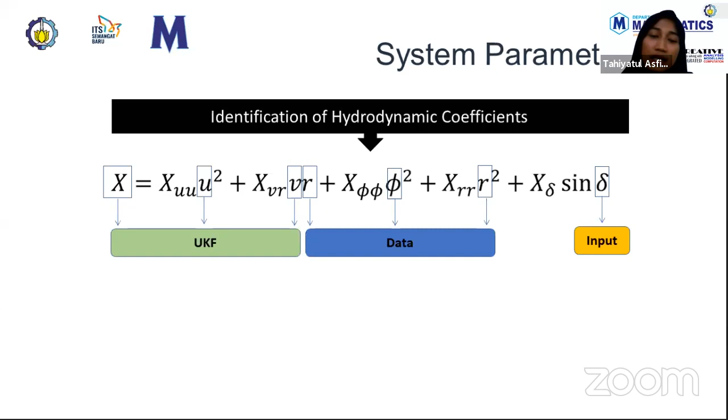Nah, ini hasil dari koefisien hidrodinamika yang ada, yang berdasarkan pada penelitian kami. Mohon maaf, Bu Hani.

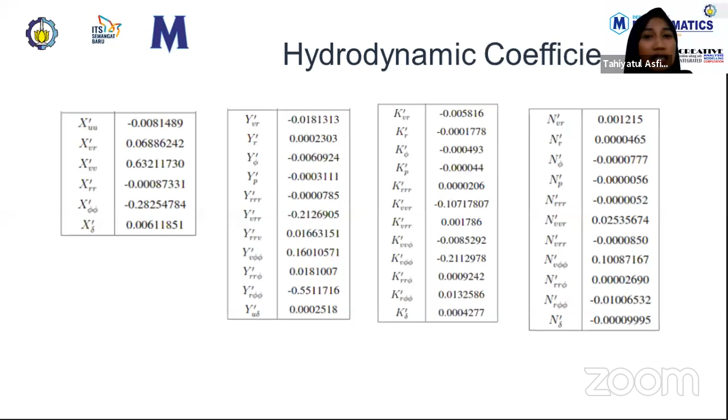Nah, ini adalah koefisien dinamika dari kapal tanpa awak kami. Ketika sudah bisa mendefinisikan ini, maka kita dapat dengan mudah membuat model matematika sehingga nanti apabila kita mempunyai lawan, maka kita bisa diprediksi oleh lawan nanti gerak kapal ini akan kemana seperti itu. Apalagi ini kondisinya adalah kapal tanpa awak, begitu. Kalau misalkan misinya diketahui seperti itu.